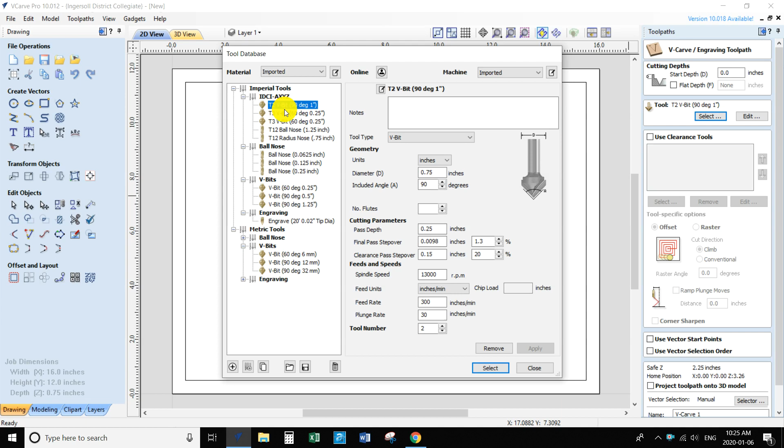This is where I would suggest you start. If you're carving a large logo, anything bigger than probably 3 inches in size, this is a good spot to start with a 90-degree bit. We're going to select everything we've done here. You'll notice I didn't quite get the whole thing, so I'm going to come back and select absolutely everything, scroll down, and let the software show us what this is going to look like.

Sometimes I'm not sure exactly what's going to happen. It's telling me a warning right away. I really like this about this software - it tells me I'm going to cut right through it, but this is just a simulation, so let's see what it's talking about here.

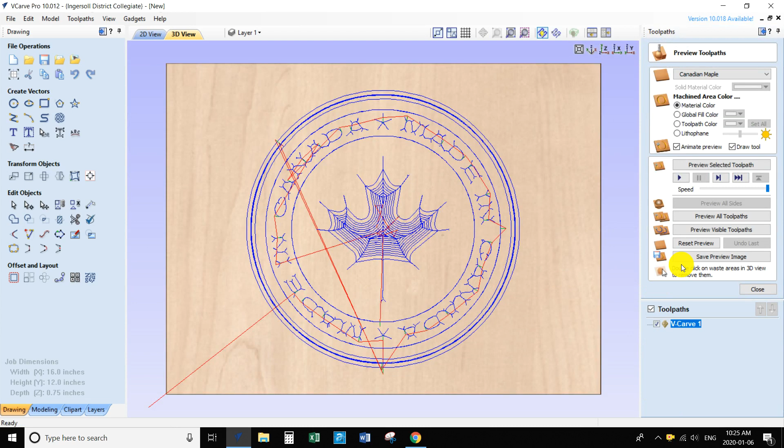I'm going to preview all my toolpaths, and you'll see that based on my material being 3/4 of an inch thick, this is going to start by carving a large V over here. It's going to carve the Made in Canada text, and then you can see if I let it go as is, it's going to actually cut right through, creating really nice sculpted lines down on the maple leaf. That looks pretty cool, but I certainly don't want to cut through my piece, and I don't want to cut into the machine itself, so that's a problem.

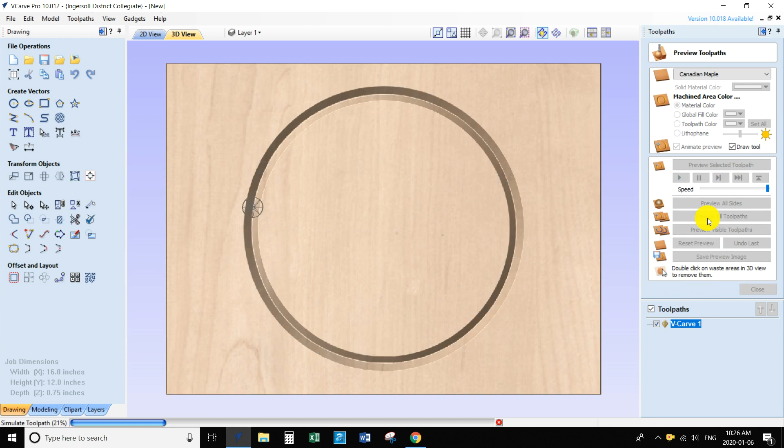So as we did in our last tutorial, we're going to come back and establish a flat bottom here. We're going to say no matter what, let's not carve any deeper than 1/4 of an inch thick, and we'll go back and calculate this. Again, when you do this, you need to come back and reset the preview, and we can preview everything all over again. So there's what I'm going to get if I go exactly as I've selected right now.

Now we've still got some choices here, and I'd like to try something different because this has carved out the text as a V pattern, but I'd like to do it where the text is raised. If you think about a Canadian coin or something like that, the text is raised and the area around the text is sunken in. So we're just going to play around here with a few different options.

We're going to go back, click on our V path, and go back to our 2D view. All I'm going to do here is unselect this outside boundary that I've made. To do that, if I just click, I lose all of them, but if I hold down the Shift key and come and touch this one, then it unselects that. So now it's only going to carve these lines.

The key with V carving is it always wants to create a path between two lines. So when I did it the first time, it was carving a V between these two areas. Now it's going to carve a V in between here - it's not going to carve out this area, it's going to leave that at full height. Now it's going to carve between the circle here and the top of the A, and that's going to give me a raised letter set.

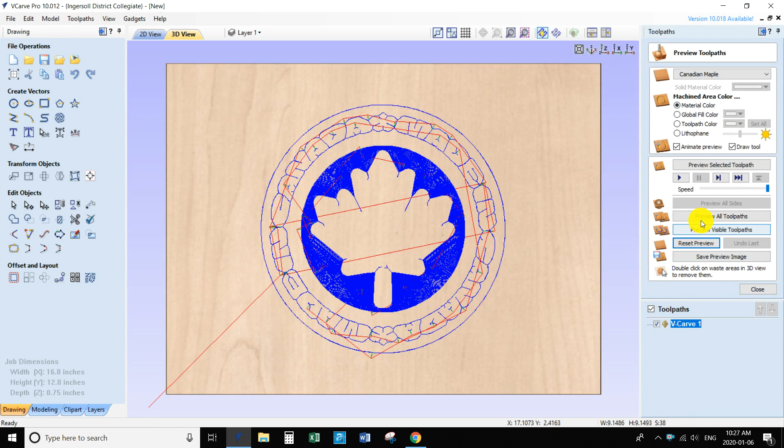So we're going to come back here and choose calculate. Again I need to reset my preview, and we're going to preview all of our toolpaths. I can already tell I like this a lot - the raised lettering here so that the Made in Canada sits sunken to the back surface, and the letters are raised out, and my maple leaf is sitting raised out.

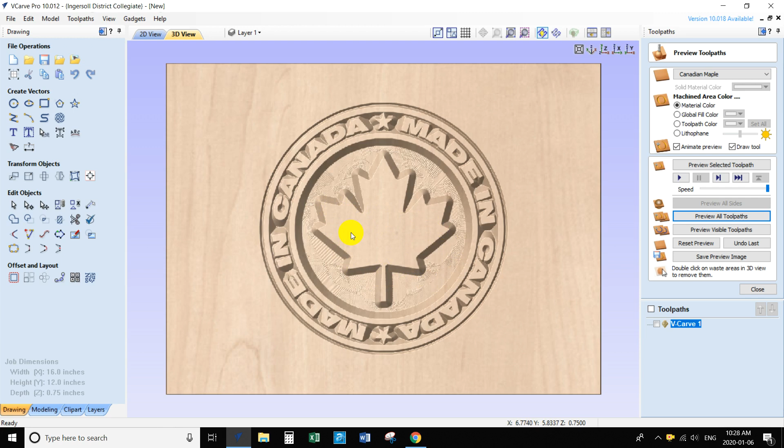We can still do some editing here. It would be neat if this maple leaf was cut into the center here, and I could still have my raised lettering. So I'm going to come back to my 2D view - this is part of the extra little fun parts that you can play with.

I'm going to select this, and I'm actually going to choose my offset command, which we use quite frequently. I'm going to offset that in maybe 1/8 of an inch, so now I have a double. And so what's going to happen now if we go back here, using that Shift key, select this one as well, and let this recalculate.

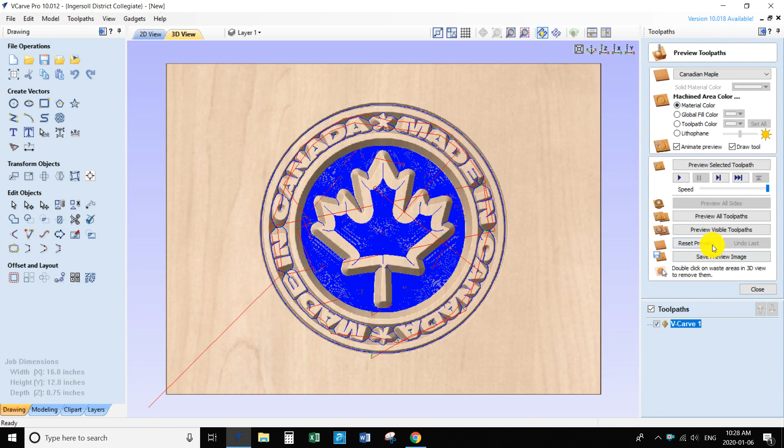Reset my preview, and let's take a look at the toolpath. I think I just fell in love, I like the way that looks. You can see all the sunken in work and the raised out leaf. I think that's got a really neat little look to it.

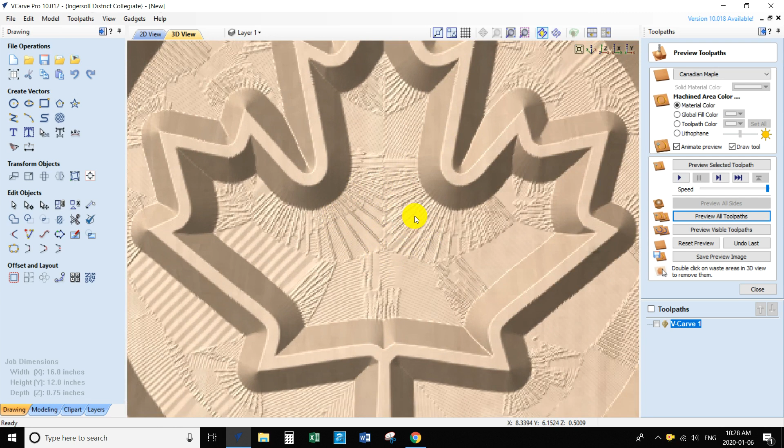You'll notice here as it machines, if I zoom in using my scroll button, you can see the V-bit's going to do a lot of work here taking out the interior. So we're going to come back here and enhance this toolpath just to speed it up. Close this, click on my V-path, and I'm going to use a clearance tool.

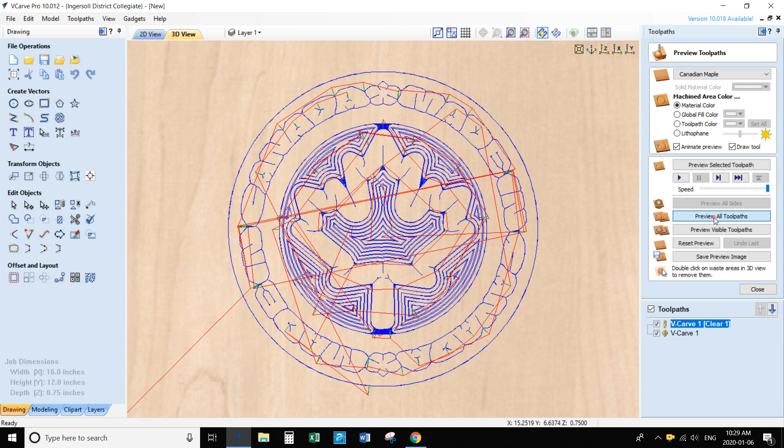So we'll hit preview, and you'll see it happen here really quickly. It's going to clean out all the rough stuff, and you can see the parts that are left here for the small little V-bit to clean out, and that's not too bad.

Now, because the machine does automatically change tools, why don't we speed this up even more with a second tool change and have it pick up an 1/8 inch end mill and let it clean that part out as well.

So I'm going to choose calculate here, and you'll notice now there's 3 tools showing. We have the V-bit that's going to go through and do the main carving, we have the clearance tool that's going to come through, and the small clearance tool that's going to come through after the fact.

So we'll reset this preview and let's take a look. We should see very little of the small mark, so you can see how it's going to finish that stuff off. I'm really happy with that. I think that looks really, really good, so we're going to consider that a perfect scenario.

But what I do want to do as an extra here is I want the machine to cut it out, so I have this extra line on the outside here, and I want a router bit to come and cut this out to create a disc for me. So I'm going to select that bit, and we're going to try a different toolpath up here.

We've used the V-carves up until now, but another very helpful toolpath is called profiling. Profiling just means you want the cutter to follow a line. Very similar in selections — I'm going to select it here, and it's going to ask me a series of questions.

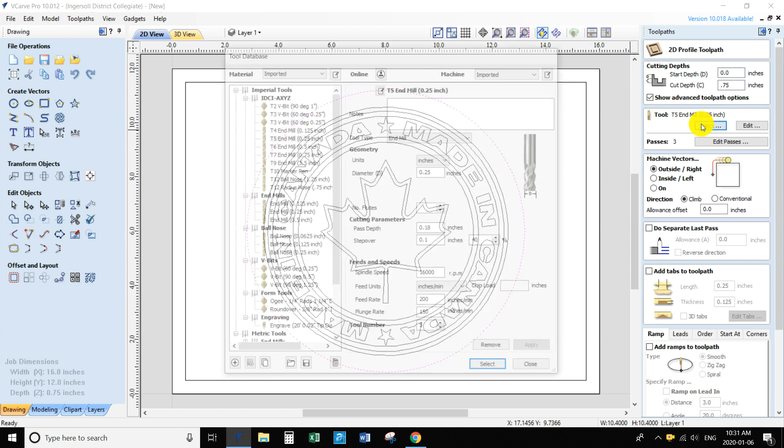Where do I want to start? Well, I want to start at the top of the part at 0. How thick is my part? 0.75, my depth. What bit do I want to use? I want to use a 1/4 inch end mill — happens to already be selected here, 0.25 end mill. And we're going to select there.

And then what do I want to do? Do I want to go on the outside of the line? You can see how it puts the bit on the outside. Do I want to go on the inside, which would then cut it a 1/4 inch smaller, or I can choose to go right on the line, which goes half of the diameter, or an 1/8 of an inch in this case. I'm going to say outside. I always climb cut when possible.

In our normal router safety, we talk about conventional cutting. We only ever cut conventionally into the feet of the bit, but because of the CNC holding our pieces for us, climb cutting allows us to do those things.

And I'm also going to add a ramping cut. Ramping cuts are used by the machine to help protect the bit. If you think about a drill bit, when we drill straight down, it plunges right down into the material. What we want to do with this ramp is have it come in on an angle.

So you can see here, here's our specified ramp. So the bit, instead of going perfectly straight down, is just going to come in. I have a distance here of 3 inches, which is great, and it's going to come in on an angle. This extends the life of our tool, so that's why we use it.

And you can see that it's now placed that path in place. If I reset my tool paths and preview all of them, it's just going to run through and show you how it's going to cut out the circle.

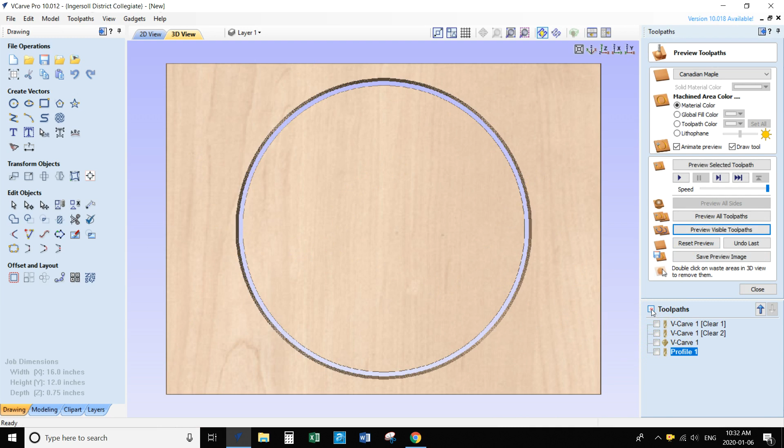Now the reason it did that is because I only have the profile selected here. But if I choose all my tool paths and reset, you can see the entire step. It's going to start with a 1/4 inch end mill, do the clearance, go to an 1/8 inch end mill, clear out more material, switch to the V bit, finish the carving, then switch to the profile bit and cut my piece out.

In this case, we do want it to go right through because we want it to free that piece from the part. We are essentially ready to go to the CNC machine at this point.

What I want you to do again is go back to this page, and when you're ready to run, find the file that's there, right click on it, and choose open. This will allow me to come over to your computer to verify what you've selected. We'll have your piece of material there to verify, and I'm going to take a look at the datum positions and clearance angles. We'll verify the tools to what's in our tool changer, and you're going to be ready to run.

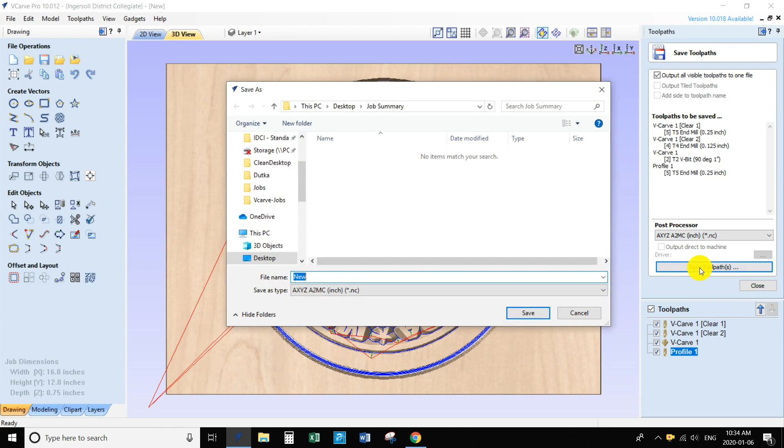With that in place, we are ready to create the actual file. So I'm going to close this, and just like you've done in all your other ones, we're going to choose all of the tool paths. You're going to export this as one single file to the AXYZ A2MC inch, and we're going to say save and put that again into our jobs folder.

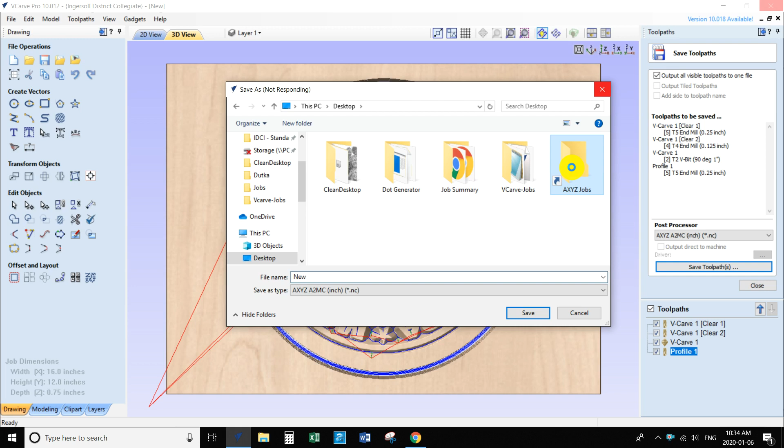Okay, so you'll be saving that into your file. I'm going to get an error here because my jobs folder is connected right to the machine, and I don't have that cable in right now. So it's going to pop up with an error saying it can't access the folder I'm looking for. But you'll save that toolpath, and we will be ready to take that stick to the CNC machine to be loaded. So we're good to go.

So that completes this module. I would encourage you to have some fun, to look for images that intrigue and are exciting to you, so you can create something that's unique and your own from this. There's nothing to stop you from also adding additional text, maybe somebody's name, or mixing and having multiple JPEGs, multiple images carved on the same thing. But work your way through, have some fun, and I look forward to seeing what you create.